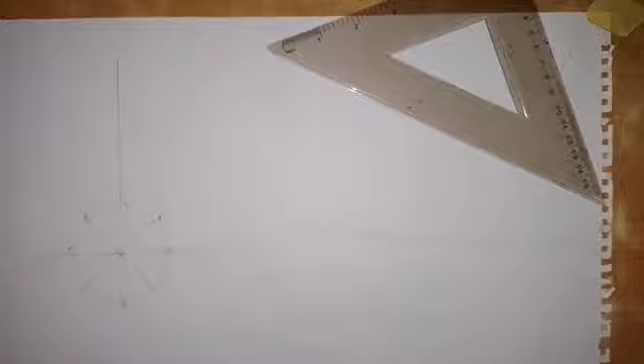So we are going to number these points on the circumference of the circle. So this is point 1. This is point 2. This is point 3. Here is point 4. This is 5. This is point 6. This is point 7. So this is 8. So we have 8 points on the circle. So we are going to join these points together.

So we join point 1 and 2 together like this. Okay. Then we join 2 and 3 together like this. Then 3 and 4, we join them together. Okay. Then point 4 and 5, we join them together like this.

Then point 5 and 6, we join them together. Then 6 and 7, we join them together. Then 7 and 8, we join them together like this. Then 8 and 1, we join them together to create an octagon. So this is an octagon now.

This is an octagon. Okay, so the next thing that we are going to do is we come up a little bit here. So we come up here and we draw a horizontal line like this. And then we take our set square to draw a vertical line to meet the horizontal line like this.

So at point 1. And then for this point 8, it's for both 8 and 2. Then we have 3 and 7 on this vertical line. Then 4 and 6, we have them on this line. And then 5, we have it at this point here. So the height of the pyramid that I'm going to use is 65 millimeters. So this is 65 millimeters.

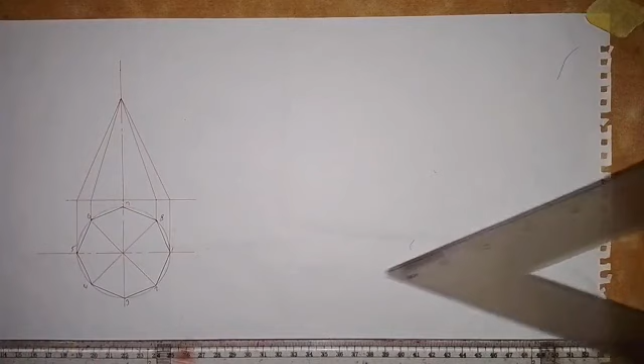Now, having joined these points with the apex, we have a cutting plane. We need to draw the cutting plane because we are dealing with a truncated octagonal pyramid. So the cutting plane, I want it to incline at an angle of 45 degrees to the horizontal, and I want it to be at this point here. Which means through this point I'm going to draw the cutting plane like this.

Alright, so this is the cutting plane. So this part is cut off. Then as this part is cut off, the remaining part, we have to make this line a thick line like this. So we make it a thick line, and also this line we make it a thick line.

So this line also is going to be a thick line because this is a corner. This is a corner here, so we can see this line, we can see this corner. So this should be a thick line, not a center line. So it's a thick line. Okay, so this line is also a thick line like this.

So then we are going to thicken the base. So this base will make it a thick line like this. So this is the plan, and this is the front elevation. Now we want to draw the complete plan.

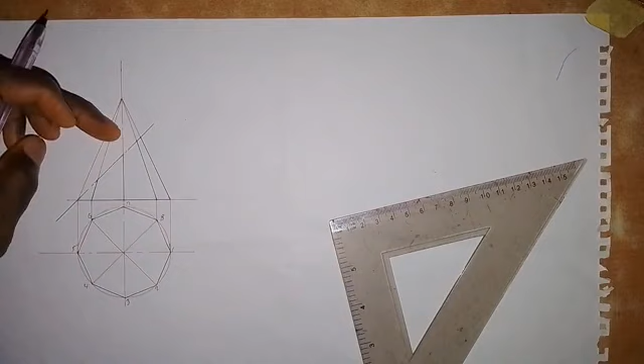So if I take off this part that is cut off, I'm going to see a rough surface here. So we want to produce the rough surface here in the plan, because if you are looking at it downward like this, we are going to see the rough surface in the plan. So let's look at how that can be done.

So what we need to do now, if I number this point on the base of the pyramid, so this is point 1 and this is point 2 and 8. So this is point 2, 8. Okay, so this is point 3, 7. So let me just manage this 7 that we have here. So this is point 4 and 6, and this is point 5 here.

Okay, so from point 1, I will draw a vertical line like this. So where the cutting plane touches this line 1, which is this point, I will draw a vertical line from this point to meet this horizontal line 1. So it touches it at this point. So we take note of it like this.

Then that of 2 and 8, which is this point. So I will also draw a vertical line here like this. So it touches 2 at this point, and it touches 8 at this point. Then for that of 3 and 7, because this is a vertical line, it's not slanting like other ones. So what I need to do to get point 3 and 7 is to draw a horizontal line from here.

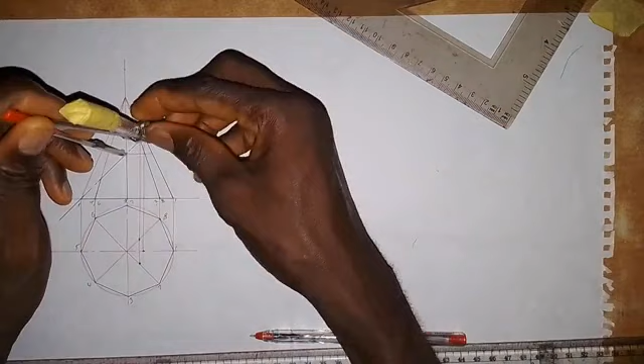Then I will take this distance with my compass from here to here. I will take this distance like this. Then I will put it at the center here. Then I will make an arc here, and then I will make an arc here like this. So this is point 3 and this is point 7.

Okay, so the next is point 4 and 6. So we are going to draw a vertical line from this point down like this. So it touches 4 at this point, and it touches 6 at this point. So for point 5, I don't have to draw any line again. We have already drawn a vertical line here, and it meets point 5 at this point, just at the point that we have there.

So we are going to join these points together like this. Okay, so we join this point together with this, and then this point we join together with this, and this point, so we join them together. So we connect this point together with this, and then we connect this point together with this.

Okay, now this shape that we have formed, we are going to hatch this surface. So we hatch this surface to show the roughness of the part that we cut off. Okay, alright, so this is how the rough surface will look.

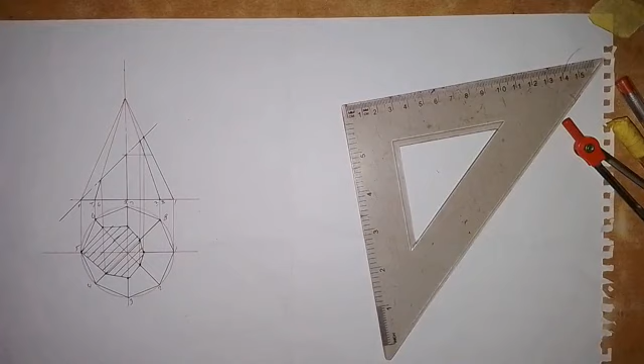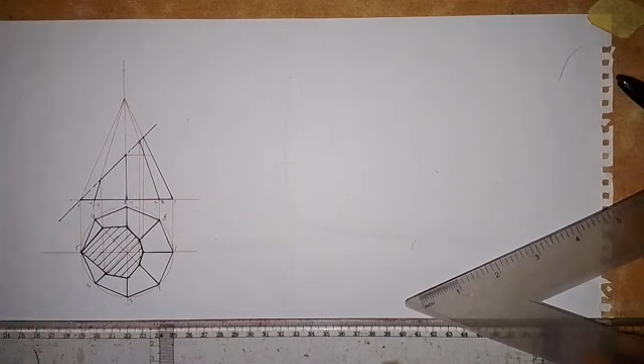Alright, having drawn the complete plan and also the front elevation, we want to draw the true shape of the cut surface. What we need to do is draw a line that is perpendicular to each of these points at which the cutting plane touches the sides of the pyramid. Since the cutting plane is inclined at an angle of 45 degrees, to draw a line at a right angle to each of these points, we still make use of our 45 degree set square.

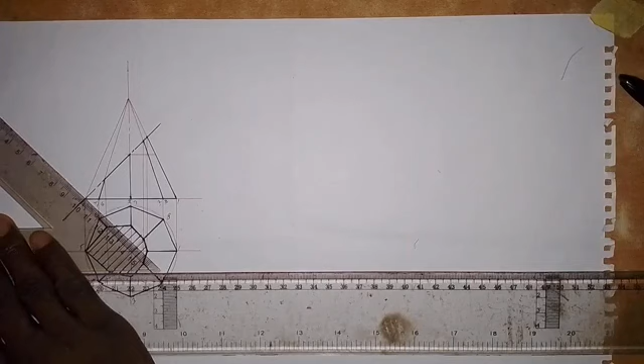So we are going to draw a line from this point in this direction. Also from this point, we draw a line in this direction. From this point here, we draw a line in this direction. And from this point, and then from here, we draw a line in this direction. Then you move away a little bit and draw a line in this direction like this.

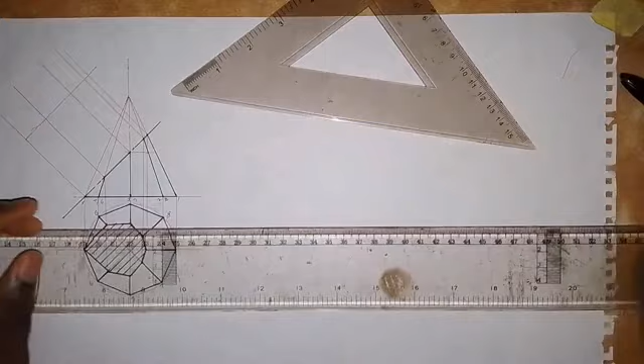Okay, if we follow the numbering that we have here, this point here will be point 5, and this point here is point 1. We now need to locate points 2, 3, 4, 6, 7, and 8. So how can we get that? This is point 2, and this is point 8. At the midpoint between 2 and 8, we put the pinpoint of our compass there, and we extend to 8 or 2, any one that we like to use.

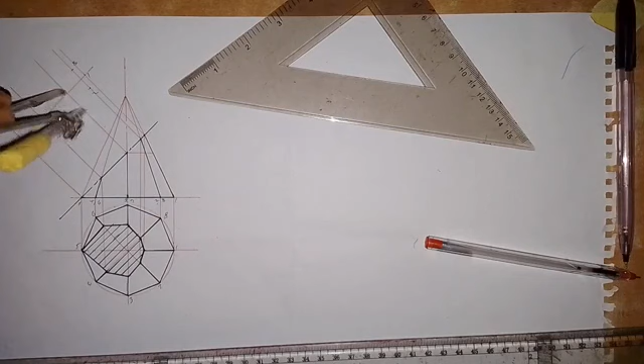After I've extended to point 8, I will follow this line that contains 2 and 8, and come to this midpoint here. Then I will make an arc on this line, and also an arc on this side. So this is point 2, while this point is 8. Then for 3 and 7, I put the compass in the middle, extend to 7 or 3. I prefer 7. I follow this line that contains 3 and 7, come to this middle point, make an arc here and an arc here. So this is point 3, and this is point 7.

Next is 4 and 6. I put the point of my compass here in between 4 and 6, and extend to point 6. I follow this line that contains 4 and 6, put the point here, then make an arc here and an arc here. So this is point 4 and this is point 6.

Okay, all these points, I'm going to join them together. We connect 4 and 5, then 3 and 4, then 2 and 3. Then we connect 1 and 2, and also 1 and 8. Then 8 and 7, then 6 and 7, and then we connect 5 and 6 together. Alright, so we have generated this shape.

This is the true shape, but we need to hatch this surface. So we take our 60 degree set square. We can't use 45, so we have to use 60 to hatch this surface. Okay, so this is the true shape as we have it here. We have drawn the true shape.

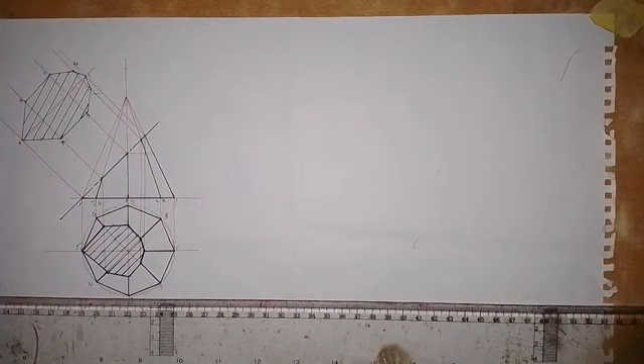The next thing that I want us to do is to produce the end elevation. Let's see how that can be done. What we need to do here is come up here first and draw horizontal lines. From this point where we have 7, I will draw a horizontal line like this. And from this point where we have 8, we draw a horizontal line like this.

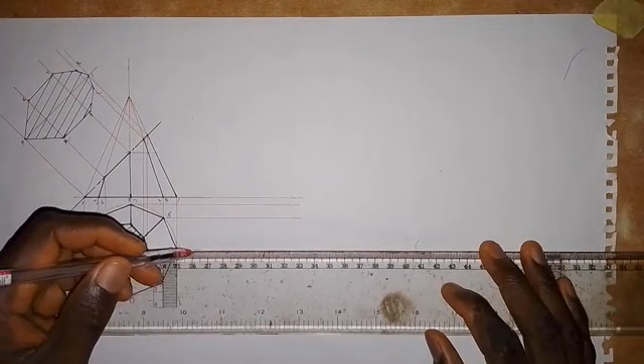So from this point where we have 1 and 5, we draw a horizontal line. From this point here where we have 2 and 4, we draw a horizontal line. And at this point we have 3, so here I will draw a horizontal line. Okay, so the next thing that I'm going to do is to take my 45 degree set square, place it at this point, and draw a line in this direction.

Now having drawn a line in this direction, I'm going to draw the first one in the center. So I will draw a vertical line like this. Okay, so from this point here, let's look at it. This point contains 3. So we have 3 on this line, and at this point we have 2 and 4 on this line. Here we have 1 and 5, and at this point we have what? We have 6 and 8. And this last one we have what? We have 7. So we have 7 here. Okay.

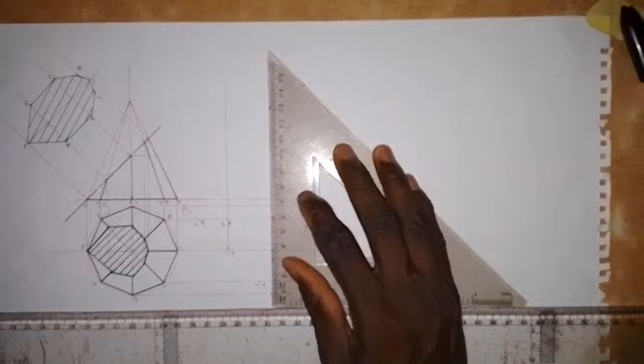Sorry, this is where I'm supposed to put 6 and 8. So 6 and 8 is supposed to be here, not on this point. Okay, so let's take note of that. So I'm going to draw a vertical line from here to meet the horizontal line at the base, which is this one. So here I will also draw a vertical line. I'll come here, I will draw a vertical line at this point, and at this point also I will draw a vertical line. So what I need to do now is to get the apex of the pyramid.

So I will draw a horizontal line from here. Okay, so then I'm going to join this point together with the apex. So I'll join this together with the apex. Also I will join this point together with the apex, and this point I will also join together with the apex, and this point I will join together with the apex.

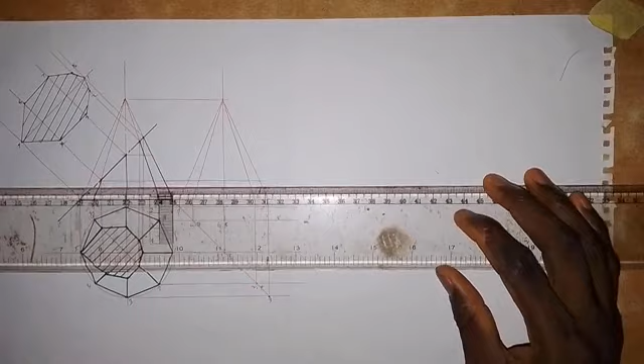Alright, so that's it. The next thing I'm going to do is draw a horizontal line from this point here. So at this point I will draw a horizontal line, and we'll draw a horizontal line from this point here. I will come to this point here, so we draw a horizontal line. Then the last point is this, we draw a horizontal line like this.

Alright, so with what we have done here, I've already drawn a horizontal line for point 5 here. So if I follow this line like this and come up here, it intersects horizontal line 5 at this point. Okay, so this point is point 5 here, so let's take note of it. Then this point here contains 4 and 6. So if I follow this line, I have 6 on this line here, so this is point 6 here. And if I follow this line here, this point is point 4. Just follow the numbering, and you will surely get it.

So this contains 3 and 7. If I follow this line, this is 7 here. So I have 7 at this point. And here, if I follow this line, I have 3 at this point here. Then this contains 2 and 8. So if I follow this line like this, I have 8 here, so this is point 8 here. Then if I follow this, I have 2 at this point. The last one is 1. So 1 is along this line where we have 5. So this is point 1 here.

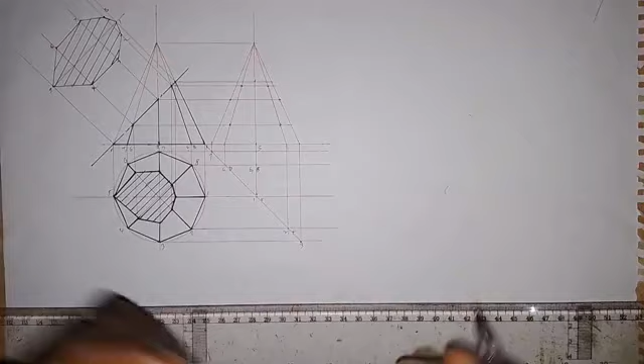So I'm going to connect all these points together with straight lines. So I'm joining this point together with this. I will join this point together. I will join this point together. I will join these 2 points together. I will join these 2 points together. Then I will connect it with this. Then this will be connected together with this. Then I will connect these 2 points together.

Alright, so this line here, I will make it a thick line. Okay, so this line also, I will make it a thick line like this. And the base, I will also make it a thick line. Okay, so do not forget that this line will also be a thick line. Likewise, this line will be a thick line. Alright, so the next thing that we are going to do is to hatch this surface to show the roughness of the part that is cut off on the remaining part. Okay.

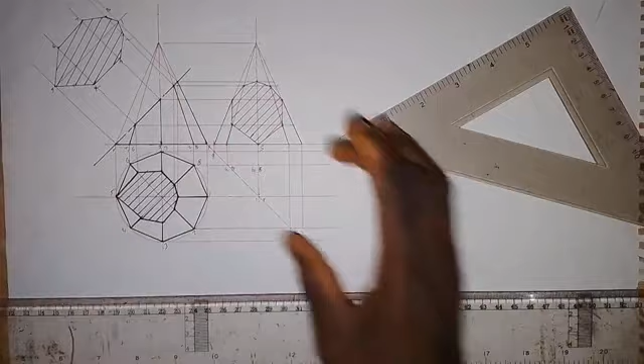Alright, so this is the end elevation, looking at it in this direction, as simple as I've done it here. So we are going to add other things to this work. I want us to draw the auxiliary plan. So auxiliary plan, how will it look?

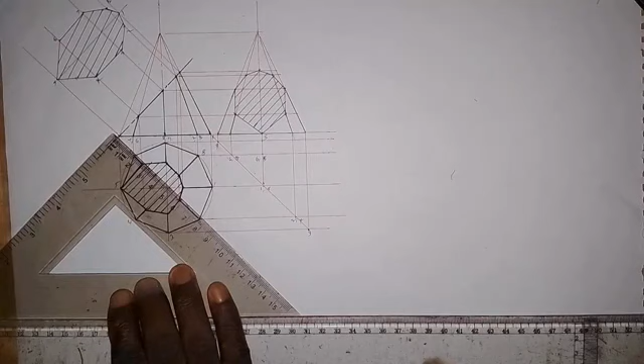So let's say the object is being viewed at an angle of 45 degrees to the horizontal. So what we need to do is to project a line from each of these points on the base or the front elevation. So from this point here, I will draw a line at an angle of 45 degrees. So I'm making use of my 45 degree set square.

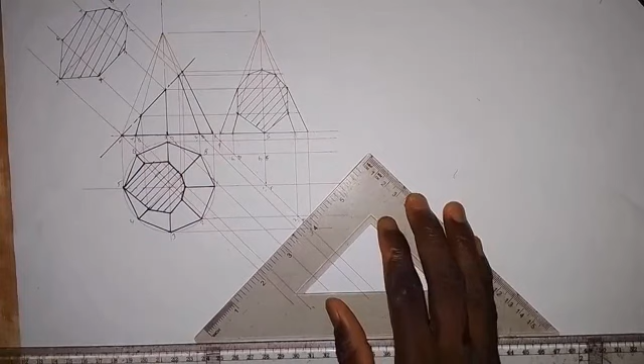So I draw in this direction, and then from this point here, we draw in this direction, and then from this point. So from this point here, I will draw in this direction. Also from this point, I will draw in this direction. Then from this point here, I will also draw a line in this direction. So with what we have here, I'll just move away a little bit.

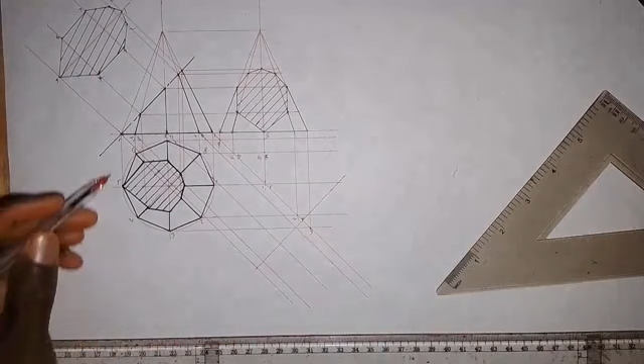So then I will draw a line that will be perpendicular to this line that I drew. So if I follow this line here, from this point here, this is point 5. So let's take note of that. And then if I follow this, this is point 1 here. So we have point 1 at this point. So we need to locate the other points. So how can we get that?

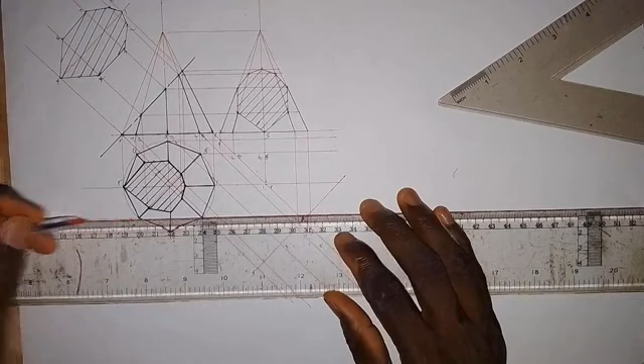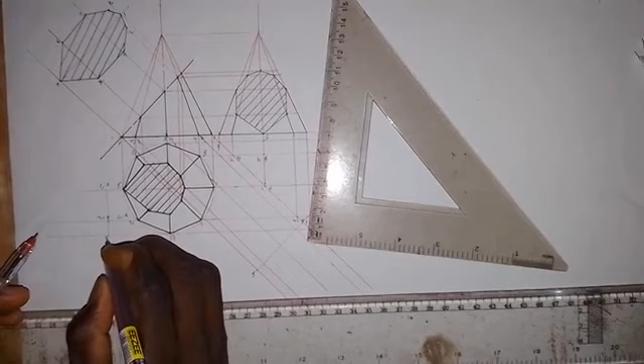So what we need to do is to draw a horizontal line from this point 3. So from point 4, we draw a horizontal line, and then with what we have here, that's enough. So for this one, on this point I have 1 and 5. So this is 1 and 5, and this will contain what this contains. This is 2, 4, and also I have 6 and 8 on this point here. While on this one I have 3, then I also have 7 on this one. So let's take note of that.

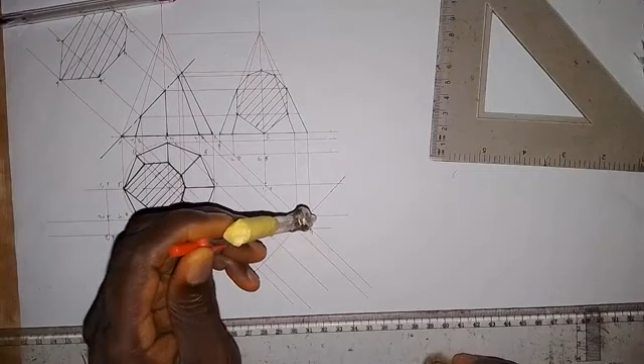So what I need to do now is that I will take my compass, put it at this point. Okay, so we have already located 1 and 5. This is 5, this is 1. So I want to locate 2 and 4. Okay, so I'll be locating, if I put it here in the middle on this line here, at this point here, I'll make an arc here, so I'll make an arc here. So I want to get the base first.

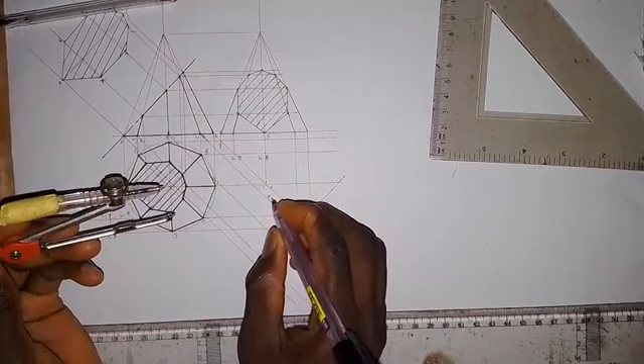So this contains 2 and 8, so this point is point 2, while this point here is point 8. So let's take note of that, this is point 8. Then the same thing applies to 4 and 6. As I said, we have 2 and 4, we have 6 and 8. So I'll just come here with the same radius, putting it at this point, I make an arc here, and I make an arc here. So this point is point 4, and this is point 6.

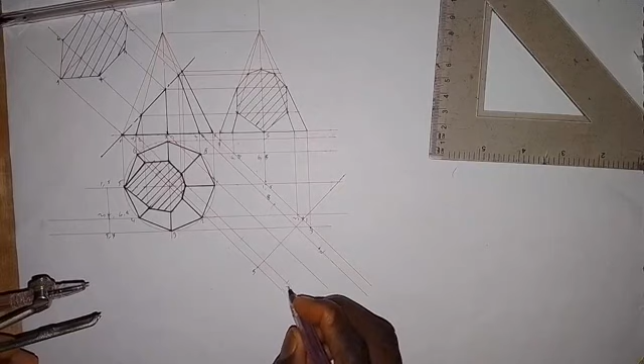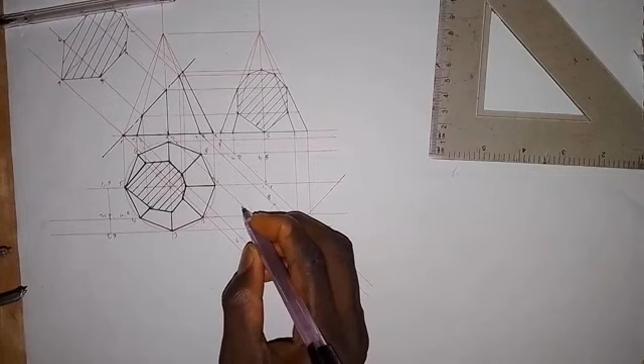So we now need 3 and 7. So I'll just put it here, extend to this point where we have 3 and 7. Then I'll put it at the middle here. I will make an arc here, and then I'll make an arc here. So this is point 3, while this point here is point 7. Okay. So the next thing I'm going to do is to join these points together. So I will join this together like this. So 4 and 5 will be joined together.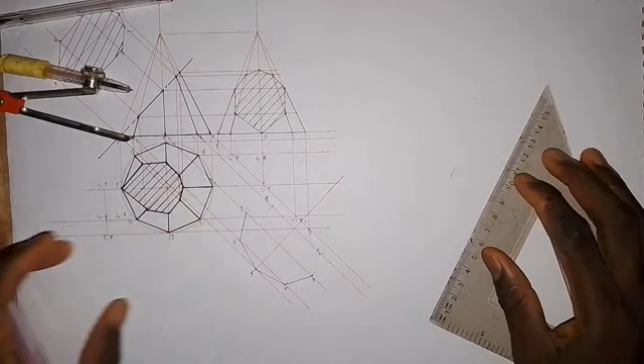Then I will join 5 and 6 together like this. Then I will join 6 and 7 together. Alright, so apart from this part that we can see here, if I'm looking in this direction, I will see this line, this line, this line, and this line. So every other one is hidden. So this will be hidden. So we draw this with short dashes line here, and this will be drawn with short dashes line. So it is hidden from us.

Also this one, sorry, this is supposed to go to 1. Okay, so it goes to 1. Then 1 to 8 here. So we join this together with short dashes line, and 8 to 7. So we join this together with short dashes line.

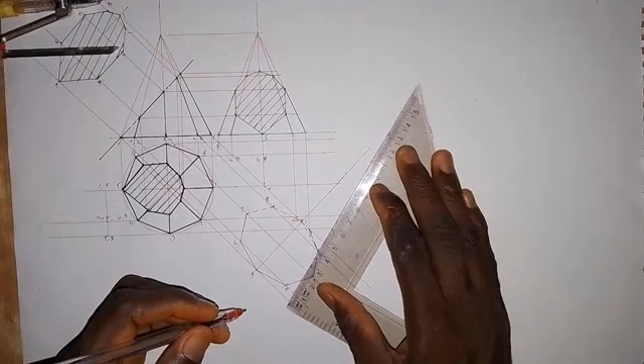Alright, so from the center here, we take the height, which is 65. I don't want to draw it from here, so I just take 65 millimeters from this center line here. So the middle line here, this is 65 millimeters. So what I need to do now is join this point 2 together with the apex like this. Okay.

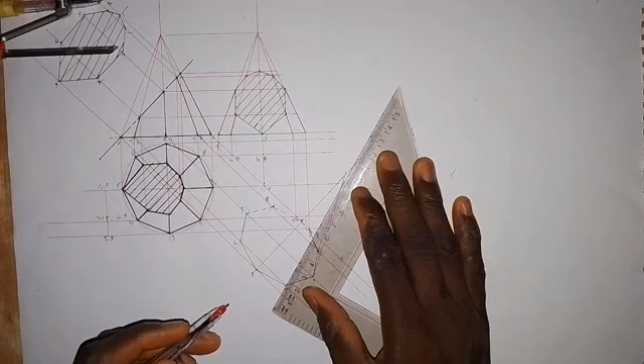Then point 3, I will join it together with the apex. Then point 4, I will join it together with the apex. Then point 6, I will join it together with the apex. Also point 7, I will join it together with the apex. Point 8 goes together with the apex. So we have already joined point 1 and 5, which is on this line.

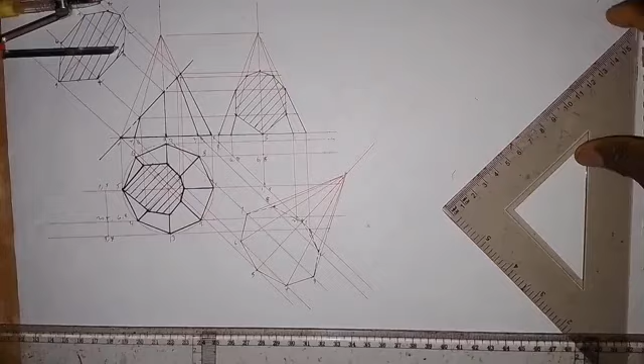So what we need to do now is take my compass, my set square. So if you look at it, I follow this line, this is point 5, so that has already been located. Okay, so the other points that we need to get are point 4 and 6. I'll just come here like this, and I will draw a horizontal line with my 45 degree set square to this point. So if I follow this line, this is point 4 on the line, and this is point 6 on the line.

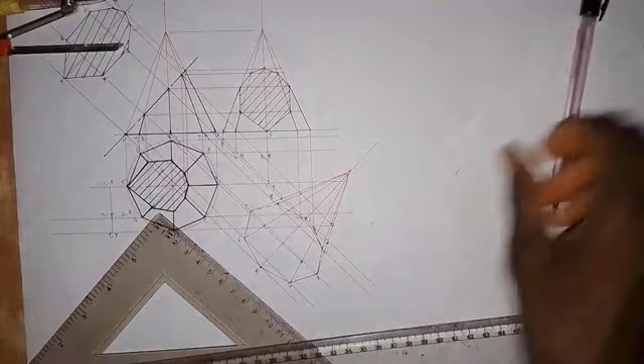Then the next is point 3 and 7. So if I draw a line from this point like this, here I have point 3, then this is point 7 here. So next is 2, 8. If I come here and draw a line in this direction, here I have point 2 and point 8. So the last one is point 1. I'll just come here and draw a line in this direction. So this is point 1.

Here is point 1. So all these points, I'm going to join them together. So I connect point 4 and 5 together like this, then point 3, I'll connect it together with point 4. Point 3 is connected together with point 2 here. Then I will connect point 1 and 2 together. Then point 1, I'll join this together. Then I'll join this point together with this, and this will be connected with point 5 like this.

So I now need to make use of my 60-degree set square to produce the section lines on this surface. So here I will draw this line. Here I will draw this section line. So here I will draw this. So here I draw this line. Here I draw this. Here I will draw this. So here I draw.

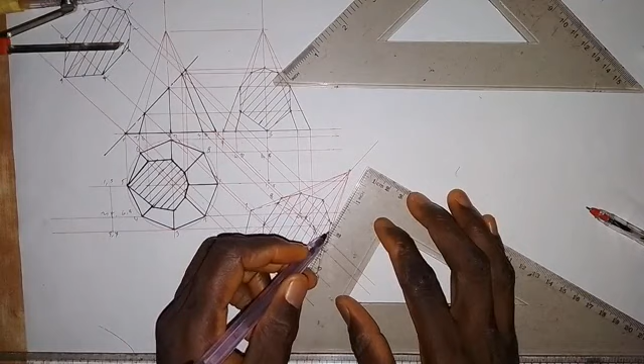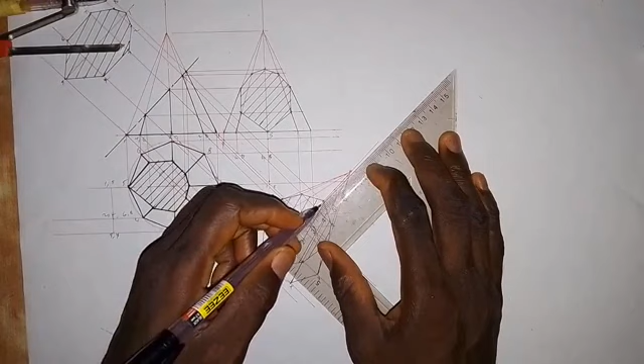And then I'm going to make this line a thick line. Also this line, and then this line also. And this line will make it a thick line, like this. Alright, other lines that we have will be hidden, like this one at 1 here, so you draw with short dashes line. The line at 8 will also be drawn with short dashes line. Likewise the line at 2 will also be drawn with short dashes line. So this is the auxiliary plan. This is how the auxiliary plan will look.

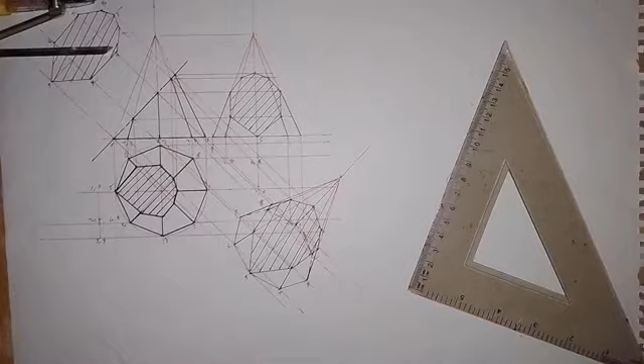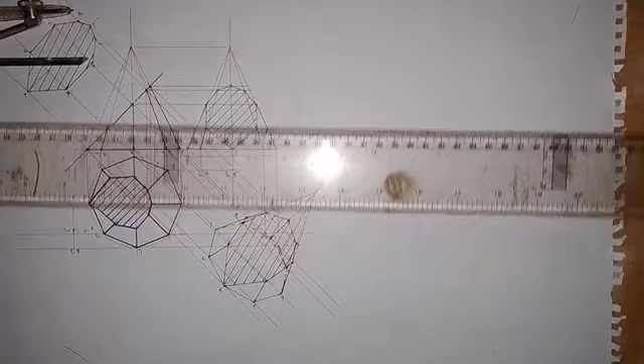So the next thing that I'm going to do here is to draw the surface development of the pyramid. Surface development, I'm going to do it here. So let's see how that can be done. We have worked so much here. So coming to this side here, I will draw a horizontal line here. So this point here, let me call it point O, which is the apex of the pyramid.

So then I will take my compass and take the true length. So this is the true length here. I just take the distance from here to this point here, then put it here at point O, and I will draw an arc.

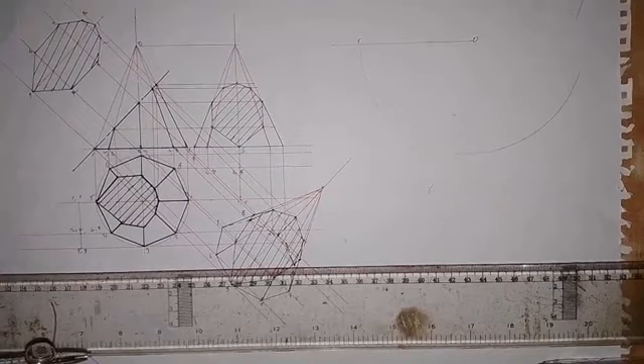Alright, so I will draw an arc like that. So let's say we're opening from here. So that's where we have O5. So this is O5 here. Then I'm going to take a measurement of distance 1 to 2, or side 1 and 2 here. So from here to here.

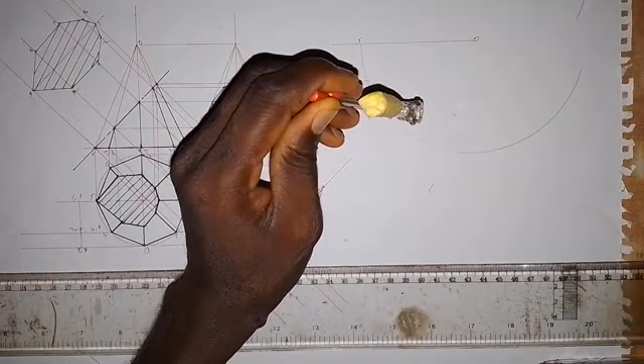So we're going to have 8 points. So here we have, this is 1. This is 2. Here we have 3. So this is 4, 5, 6, 7, and then we have 8. So if I number this, we are starting from, this is also 5 here. So let's take note of that.

So after 5 I have 4, 6. Then I have what? I have 3 and 7. Then next I have what? I have 2, 8. Then we have 1 here.

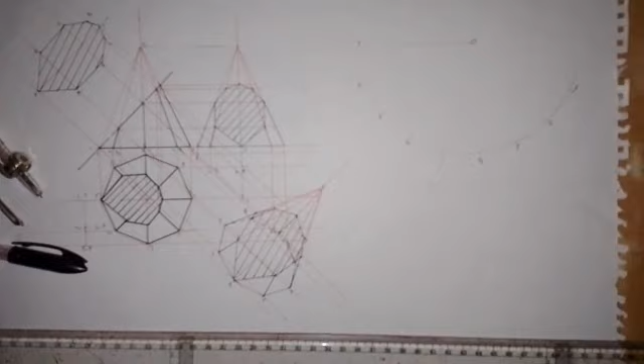So I'm going to connect this point together with point O here. So I will connect this together with this point like this. So here I will connect this point together. Okay, so connect them together. So here I'll connect point 1 together with point O, and then point 8 will be connected together with point O. Also point 7, we connect it together with point O here.

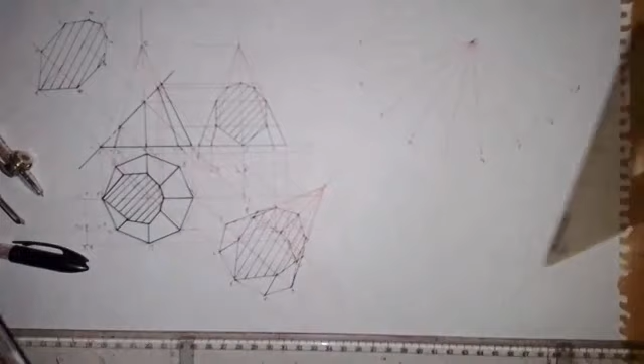So point 6, we connect together with point O. Also point 5 here, we connect together with point O here. Alright, so with all that we have done, the next thing that we are going to do, I will take my compass. So I will put it at this point here and extend to 5. But for 5, 5 is already here. So this is the point. So I don't have to take that.

So this is O5, this is O5, based on how the cutting plane cut the pyramid. So I'll just extend it to 4 and 6. So I'll put it at this point, and I'll make an arc here on 4, make an arc here on 6. So next is from O to 3,7, which is this point. So I'll put it here and make an arc on 3, and I make an arc on 7. So next is from O to 2,8. So I put it at this point, so I make an arc on 8 and also on 2.

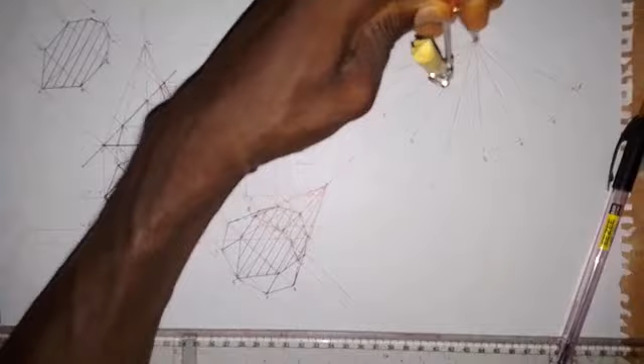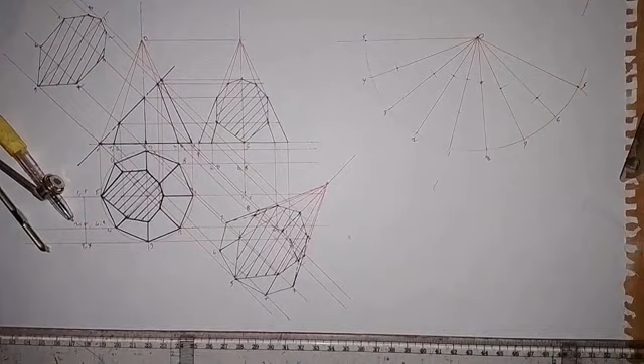So the last one is O1, which is here. So I'll make an arc at this point here. Alright, so here we have this point. So this point here. Okay, so all these points, we are going to join them together with straight lines, because this is a pyramid, it's not a cone. You are not to use your French curve for this. You have to use your ruler to join them together.

Okay, so we join this together with this. So also we join this point together. So we join this point together with this. So we join this point together with this point. So also we join this together, and this also. So we join this together, and then this point, we join it together with this. Then we are going to line the base. So the base are straight lines.

So we join points 5 and 6 together, then 6 and 7 together with a straight line. So 7 and 8 together with a straight line, then 8 and 1 together with a straight line. So 1 and 2 together with a straight line, then 2 and 3 together with a straight line. Okay, so 3 and 4 together with a straight line like this. Okay, so points 4 and 5, we join them together with a straight line.

So the next thing that we need to do is that we need to make this a thick line. These are the edges of the pyramid, so we need to make them thick. Okay, so also make this a thick line. So we also make this a thick line. So make this a thick line. Then this one, make it a thick line.

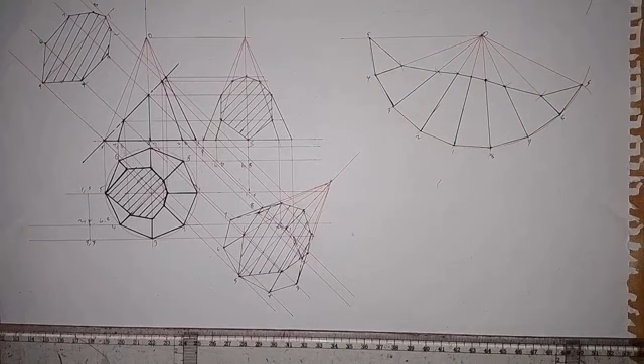So this is the end of our work on the truncated octagonal pyramid. As simple as I've done it here, all you need to do is to practice.